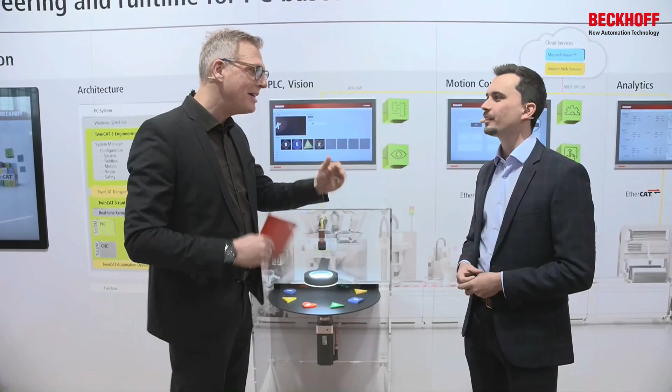But usually, I think we talked about EtherCAT, and Hans said, well, the PC and EtherCAT was already there 20 years ago. Well, there was something else already there, and this was TwinCAT, because TwinCAT is also available for many years. In the past, TwinCAT 2, which is still there, but now TwinCAT 3. TwinCAT 3 is developing, although it's always the same TwinCAT 3, and now a new build shows up, 4026, and I was told that customers look particularly for this build, which is released this summer.

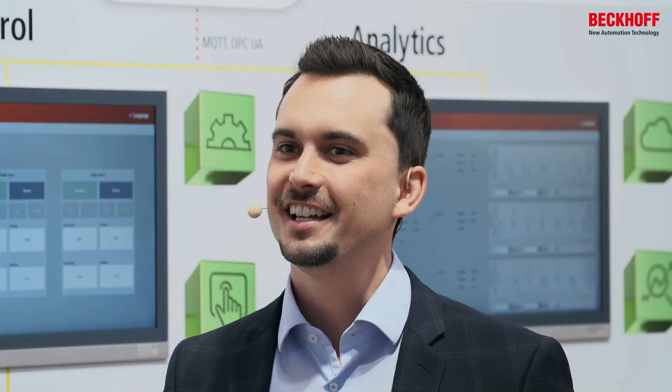Yes. So what's new, Bela? So first of all, you're totally right. It's released in June this year, and we have quite a high number of new features being available with build 4026. Today I would like to concentrate on two of them. All right. So the first one is based on the Visual Studio 2022 integration, which we have already presented. The new Visual Studio enables the user to, for the first time, use a 64-bit process. Oh, that's what people are waiting for, don't they?

Yes, because you have a lot more memory available for loading huge TwinCAT projects or a summary of more than only one project in one Visual Studio instance. Okay, this is, I think, a real trend. Like the CPUs are all 64-bit rated now, same now for the Visual Studio. True. But what is the second highlight you want to tell us? The second highlight is the

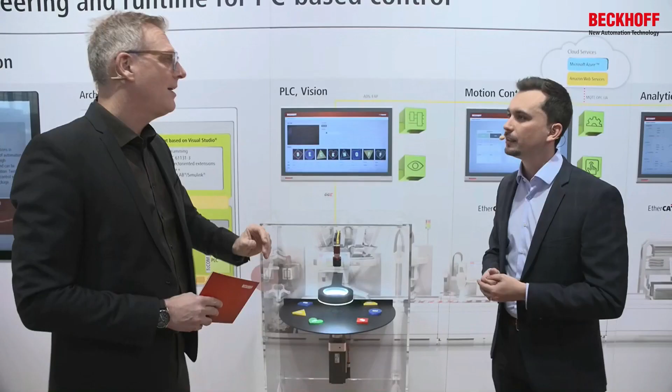package management, which means that in the future, as TwinCAT is already pretty modular, we are separating further into packages, and this makes the handling of TwinCAT versions much easier, because you, for example, can have the PLC engineering exchanged and replaced by a newer version, although the main TwinCAT function will stay the same. So they're smaller in size, they're easier to install and to update, and you just pick the package you need. Yes, absolutely right. There will be totally new workflows actually, which are available based on the package management.

So for us, it was always a task to enable the customer to get access early to test versions, and this is what we are going to do in the future. We will have a separate way of accessing these test versions, and those test versions can simply be installed by the customer. If they, for example, would like to test a new feature on the PLC, this will be easily possible. So they just grab the PLC package basically, and these are what you call the pioneer customers, right? Absolutely right, yes. Well, what about people like myself, the normal guys? So what do they do?

So we have two different feeds. One is the Pioneer feed, it's called the testing feed, and the other one is the standard feed. And this standard feed is usually used by the customer. It's pre-configured, so you don't have to change anything, and it's based on the version which we internally fixed and tested in combination. So although we have this flexibility, we still have the system tested in combination as the customers are used to, and they can still use this standard feed and download those packages and functionalities.

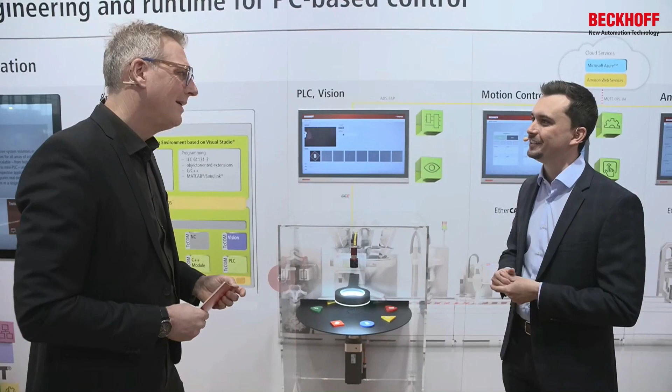Now I understand why customers are waiting for that. Usually they always wait for new features, what we add and add and add, but now you optimize also the standard installation process as well as the backbone Visual Studio. Absolutely. Well, Bela, many thanks for this insight.

We auto-tune motion products. And in order to explain this, I got two experts with me, Daniel and Pascal. So we talk about auto-tuning. So let's say, when and what is this all about? The auto-tuning is an automatic function to optimize servo drives. Nothing with cars, right? No. Okay. It has nothing to do with automotive, nothing with cars. We only tune servo axes and try to optimize them. This is necessary, or each customer has the need to optimize the axis.

He wants to avoid vibration, resonances, and instability of the axis, because if that's possible, the product quality is better, the quantity can be also higher, and we can increase the lifetime of the mechanical parts because we do not have overshooting and stuff like that. So there are a lot of benefits of tuning axes.

But I think that requires a lot of expertise. I think there is the senior engineer with 150 years of experience who then manipulates all the little push buttons and tunes it. But now you add auto, which I think is automatic, right? So what is now necessary? What skills? Well, Roland, in general, it is still a little bit necessary to have small expertise in drive tuning, right? Yes, okay.

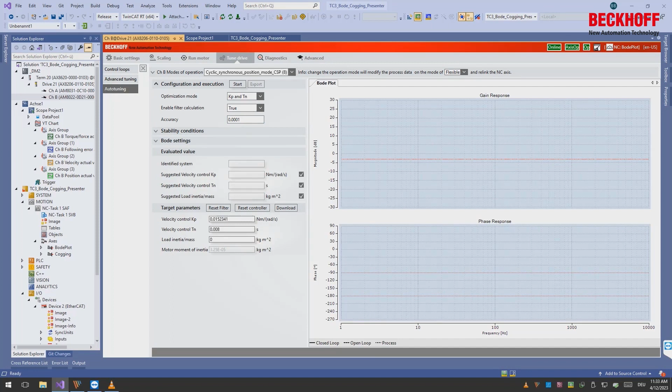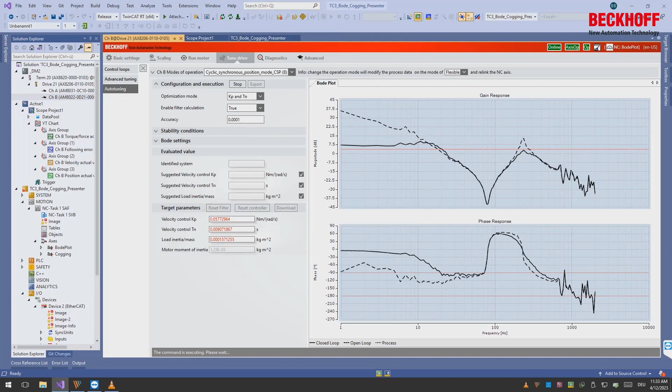As Pascal already mentioned, we do a frequency analysis of the axis, and we get out a phase response and a gain response. With these curves, the software can find out the inertia of the axis, or if it's a linear motor, the moved mass. This is the first one. Furthermore, we can see in this response whether there is a resonance. Okay. If so, then the software designs a notch filter, for example, to damp this frequency

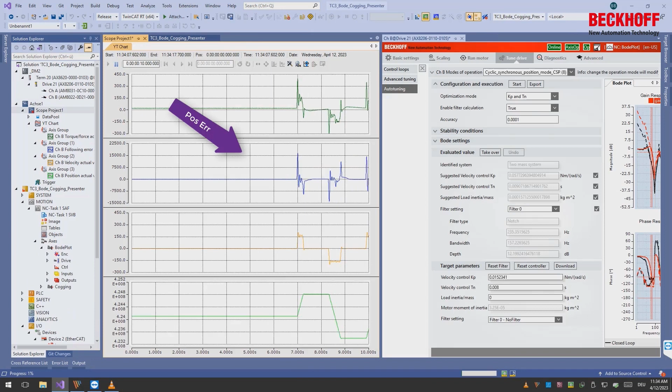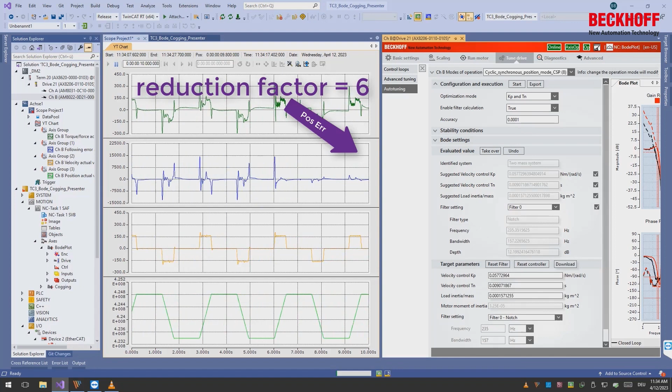so that we avoid the vibration. And third, we optimize the velocity controller gain. We consider the stability criteria and get the best possible result for the velocity loop with the mechanical system. So it's basically a complete package, and everything that could happen on the drive is optimized, more or less. Yes, yes. Now, one click, everything optimized, only a little experience needed. Now, how can customers get access to it? Do they buy a big package, or what is the next step?

So, Roland, it is very important for us that auto tuning is a basic and fundamental part of our motion solution, right? Yeah. So it is integrated in the TwinCAT Drive Manager 2, which has been supporting our machine commissioners for several years in drive tuning in general. There we now add a tab for auto tuning, and then it is really this one-click approach we described, right? Okay. And this is free of charge, because everyone needs it, and it makes full sense for the experts, also as a starting point, but also for all the others who don't have that deep knowledge.

Okay. But if this is so easy and free of charge, do I need very specific drives to use it? Yeah, that's true. We have it for different drives. Okay, for which ones is it available? We have it also for older drives, so the AX5000, which is not the newest product we have. AX8000 and also the AMP8000 are supported in the first step. The 48-volt class will follow in the next months, and we're working to develop this.

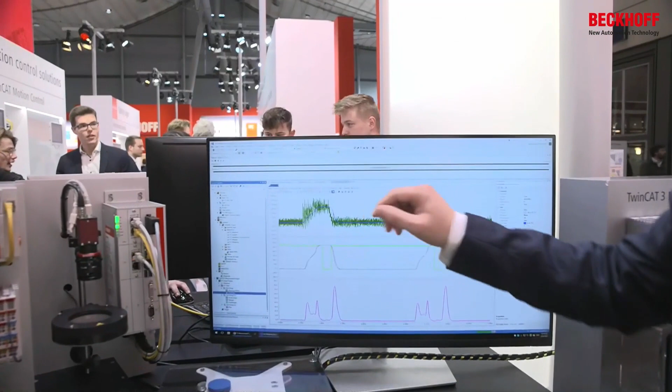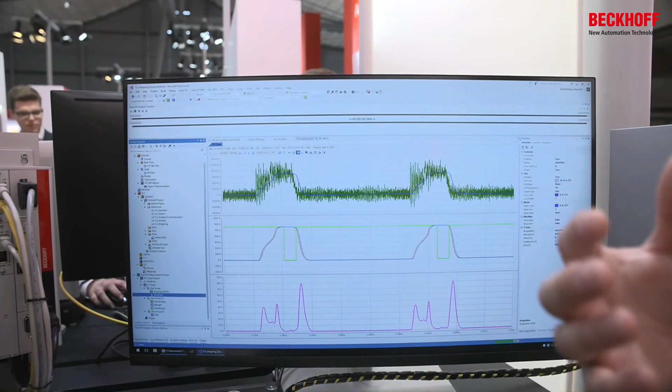You can see that here. We get a very noisy signal from the terminal, then we make the filtering and get the blue line, for example. Then we have a flat area, and in this flat area we can really make the measurements. Especially for dynamic weighing, you need to be very quick with the filtering, and precise, so that you have a precise measurement. So this is very important.

And what you said about expert and non-expert modes is something we often provide for our products. That is also a point here. We have a function block, I would say a 70% solution, where we do everything for you: the complete filtering and all this stuff. So this is a good and easy solution. And then we have a more complex solution with different steps you can do with the library, where we allow you to apply your really specific filtering, because you have such a special use case.

So it's basically a pyramid. I have preset functionalities for people who are new or who just want a solution. We have expert functionalities for people who really want to dig in deeply. And then we have our own experts who can actually help with designing, for example, the filter which flattens this curve. Experts are always required because automation technology is very human.

You already talked about many different product codes for analog terminals, and one who has been with these product codes for more or less their entire development is standing now with Roland. This is Michael, so let's look what they have to say.